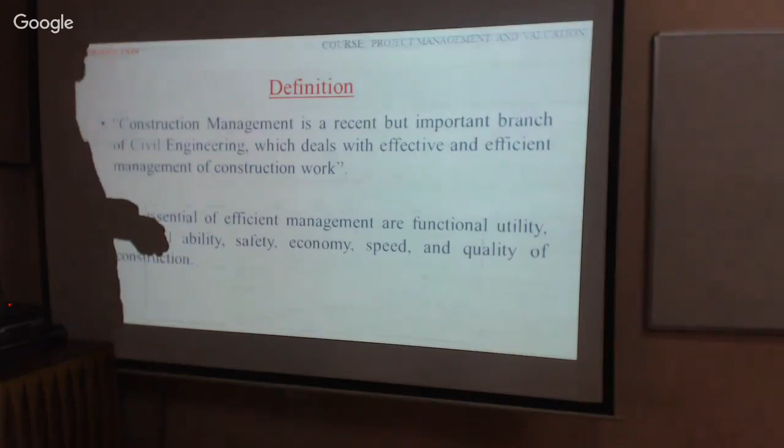It is better, let us continue. Continuously, if we go through this we can understand many things. This is the second class. Already we have discussed that construction management is a skill-oriented topic. We are not calculating anything, we are not designing anything.

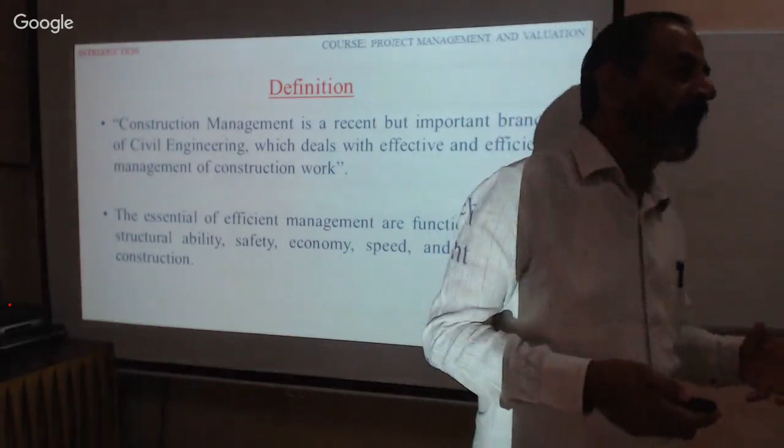We have to manage the project. The project may be anything: construction of buildings, bridges, roads, whatever may be the infrastructure. I will discuss elaborately one by one. Now the main object of this subject, project management - who can manage? Who can be a construction manager? The construction manager must be a civil engineer or any other engineer. Any engineer can become the construction manager. Manager can be anybody who manages the projects, the manpower, the human resource, who manages the business organization - anybody can become the manager.

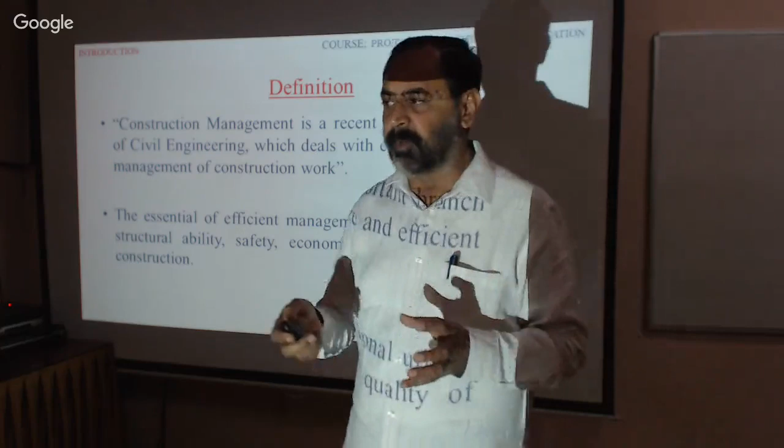But when you come to project management, project is also different - we have different areas, in different disciplines we can find projects. Project means a group of people put together executing a job, a particular job. With respect to civil engineers we are discussing, so this subject is related to civil engineers. Therefore I am concentrating on civil engineering projects. Please understand, whenever I say projects, it means projects related to civil engineering structures. Let us understand like this.

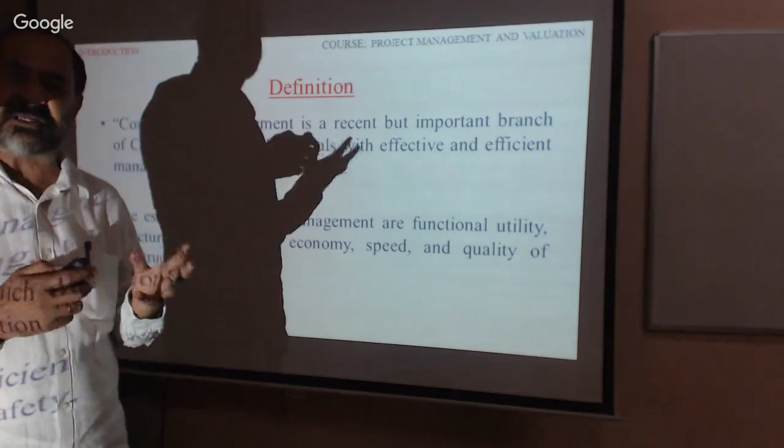The main definition is efficiency and time. Efficiency means, in all activities of construction, achieving more by spending less - that is efficiency. We can't build the structure without material, we must use appropriate material. While using appropriate material, one should remember there should be no wastage - that is the efficiency you can achieve.

We can control the cost, we can speed up, we have to plan - that is the definition of construction management. We have to achieve quality, structural ability, functional utility. Whoever may be called an engineer, particularly a civil engineer, should know this.

This is the functional aspect, functional utility. It means for the purpose for which we are building or constructing, it should be utilized for that purpose - it serves the purpose. It should be utilized for the particular purpose.

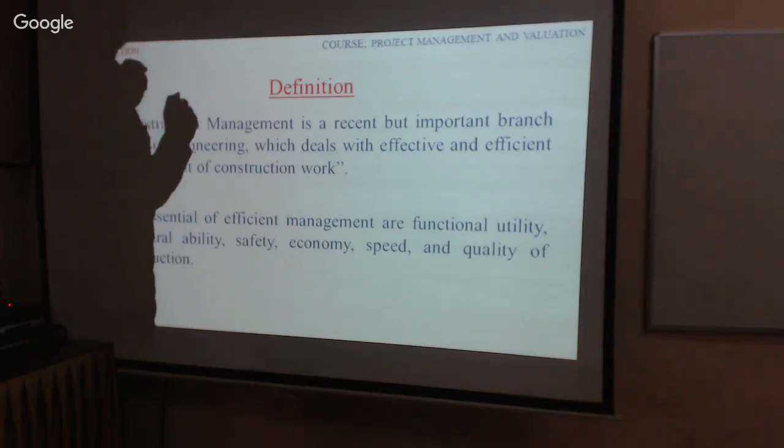The second one, structural ability, means sound and strong. Whatever we build should be sound and strong, to bear the loads and resist forces. Please remember, safety is also one of the important factors to know about. And achieving the economy means spend less, get more - economy and speed.

Whenever you finish the job and want the building completed, you need thorough scientific planning, isn't it? That is what we are discussing in this subject, also without compromising the quality of the construction.

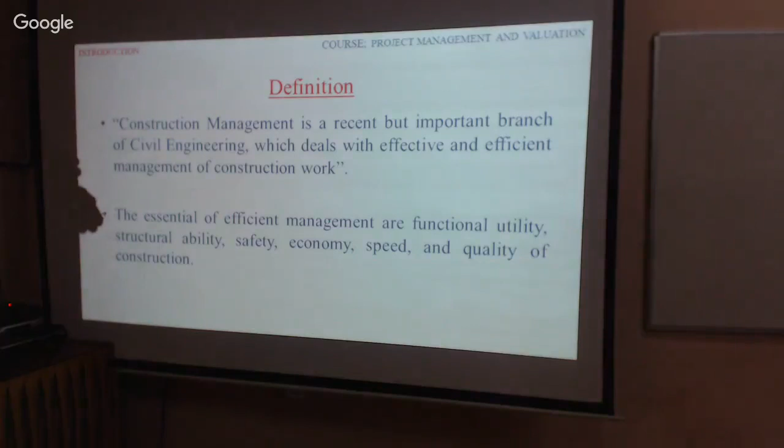Please remember, no doubt, this is one I discussed elaborately in the last class. This is the KRS Dam built by Sir M.V. If you go through the theory and history, we can find out so many things, isn't it?

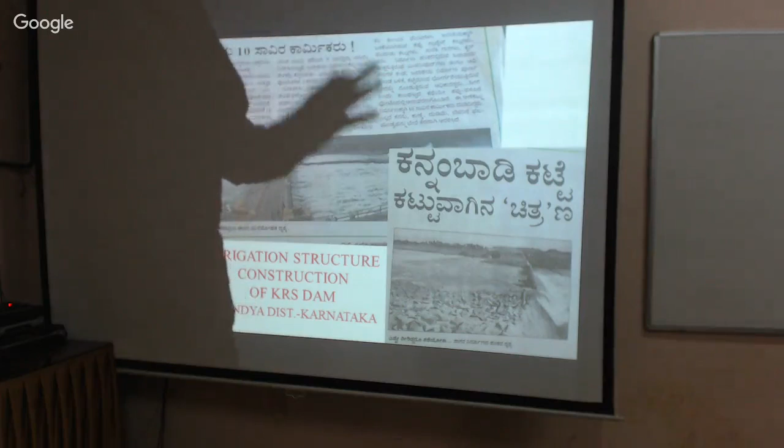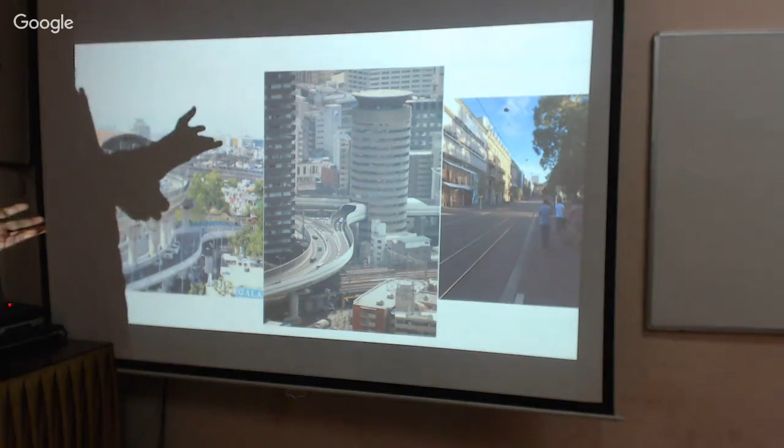This is project one, see this. This is the metro rail, and these are the buildings - office buildings, commercial buildings. Everything we have here - flyover, road, metro, everything. These are the projects. When you look at this, everybody will be happy, isn't it? All the engineers will be proud to be part of this organization, part of this project. You may be one among them tomorrow.

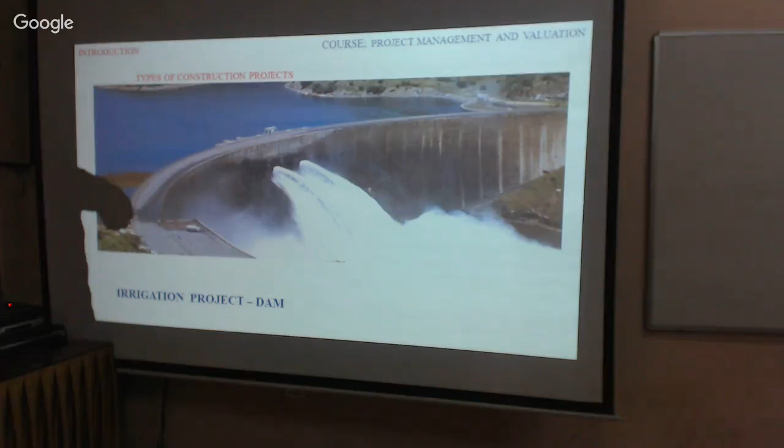Similarly, this is another irrigation project, the Arch Dam. There is a purpose for this - why they build it this way is that the length is more, but it is more stable. And this is one industrial shed constructed by steel structure.

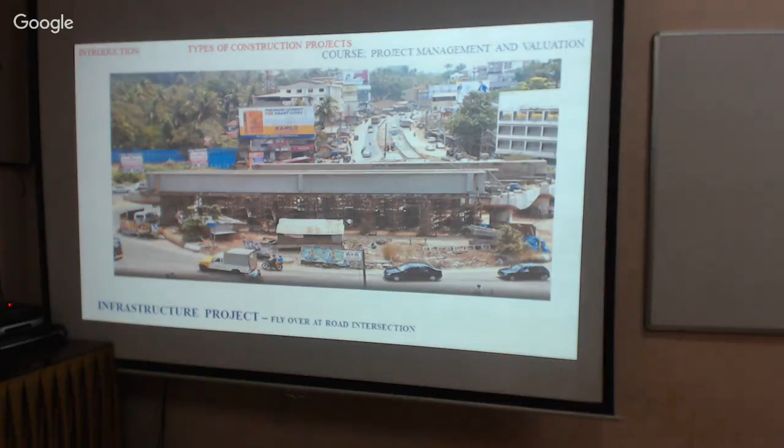And we have another project, construction of a flyover - I think you can recognize where it is. And this is road construction, another infrastructure project. These are the projects, handled by individual engineers or a group of engineers, isn't it?

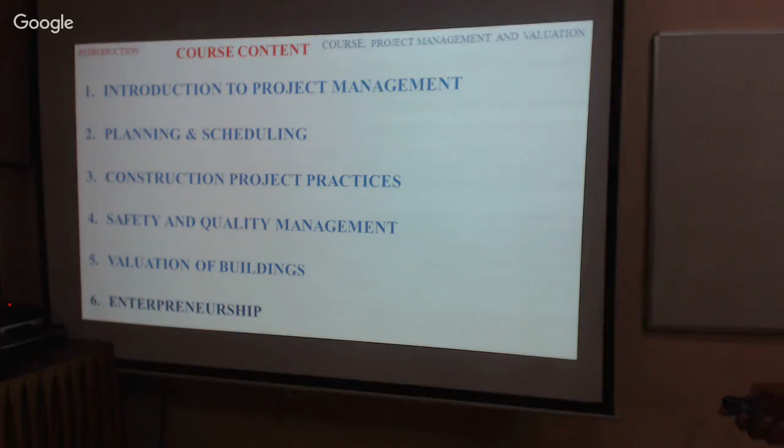Now this is the course content we have in our syllabus. The first is introduction to project management, planning and scheduling, construction project practices, safety and quality management, valuation of buildings, and entrepreneurship development. These things we have in our course content syllabus. This is again more explanation about the syllabus, available on the net.

You can go through the text to see what contents we have in the syllabus. In the last class also I explained about it, so let's just go through the course contents - we will discuss one by one later. Similarly, there are 6 units we have, which we will discuss one by one later. Please remember, whenever project management comes into picture, what is the aim?

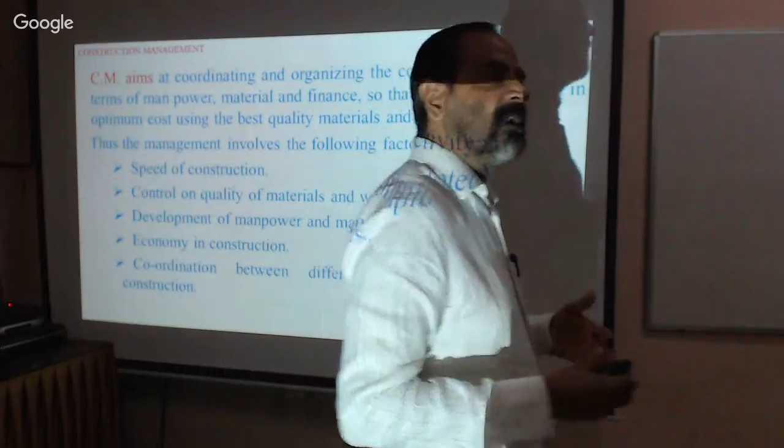What are the aims? The aim is speed of construction. When you complete the project within the specified time, that starts yielding benefits. For example, if you want to construct a residential building, you fix the time, organize the money, organize the material, and organize the people. You must plan in the right manner, and then definitely you can achieve speed.

When you fix a building construction activity, prepare the plan, obtain permission from authorities, you have to organize when it should be commenced and completed. This you have to plan properly. Otherwise, suppose if you complete within 3 months, you may need to go to the site for 10 or 20 days. If the same project takes 6 months, you need to go more number of times. If you extend it further, you need to go even more.

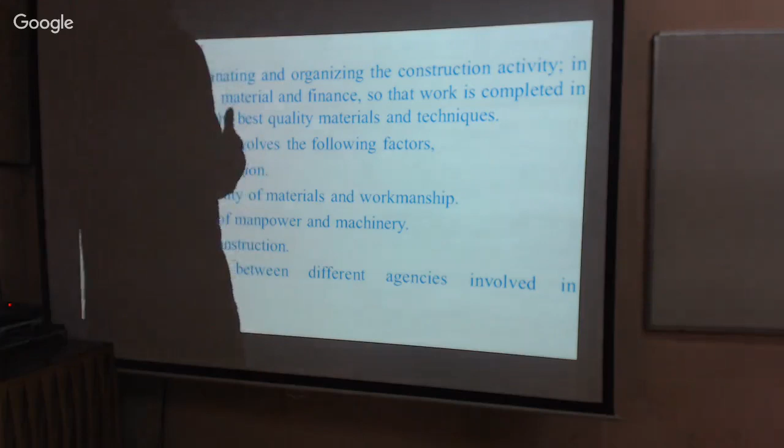Sometimes our Indian Standard Bureau keeps modifying the codes, depending upon time availability, changing technology. The codes will be modified. Therefore, you must go through the code, learn it, understand it, and read it now and then. It is compulsory - one should understand it. Then you will become a professional, a master in your field.

Quality control is one of the most important aspects. You can recognize the quality of any structure just by seeing it. An ordinary person will say this is good or this is bad - everybody, ordinary people, will speak about construction activities. Therefore you have to follow these things - workmanship, finishing.

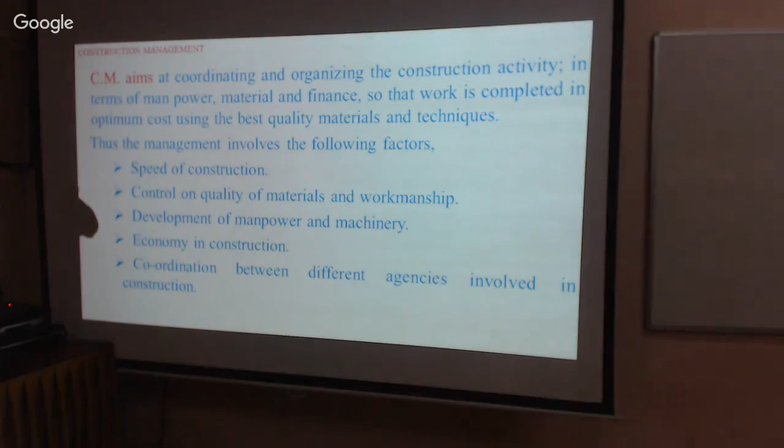Scientific method should be applied, proper way and proper techniques must be utilized - like manpower and machinery, development of manpower and machinery. To complete or execute a project, we need different kinds of people. I will explain that elaborately in the next slides.

Similarly, economy - construction economy, and coordination between the different agencies. I'll come to that in the next slides. And in any construction activity, please remember the number one, the first one, is material.

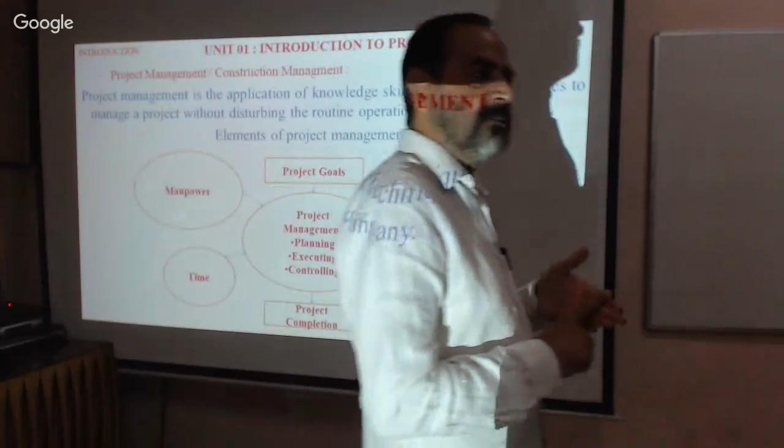Men, material, machines, and money are involved - it means 4 M's. You must always keep these 4 M's in mind. You have to manage these 4 M's, plus one more element: time. If you manage these elements, definitely you will be called a professional.

Now please understand, over the last 3.5 years, 2.5 years, you have learned how to prepare building drawings, bridge drawings, irrigation structures, and structural drawings with detailing. You have learned what is concrete and what is cement, how to prepare the estimate, and how to conduct the survey, gather information from the field, and process it.

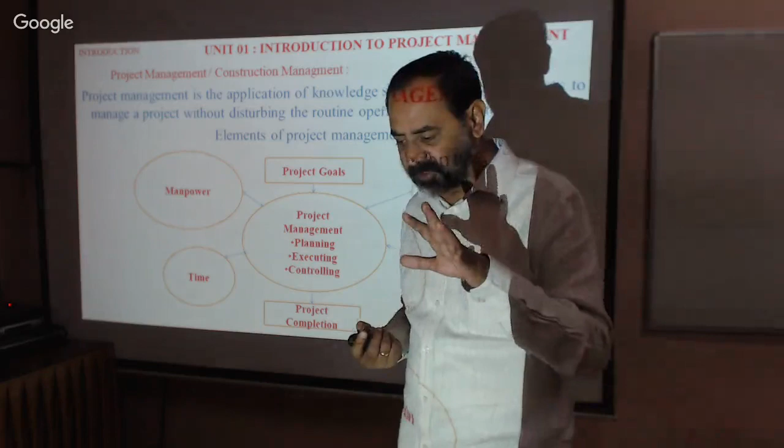Therefore, now you have to manage all those things: the technology, men, material, machine, and money. If you manage these 4 things plus time, definitely you will be called the professional, and you will be a good manager. This is the main object of construction management - we are managing these things.

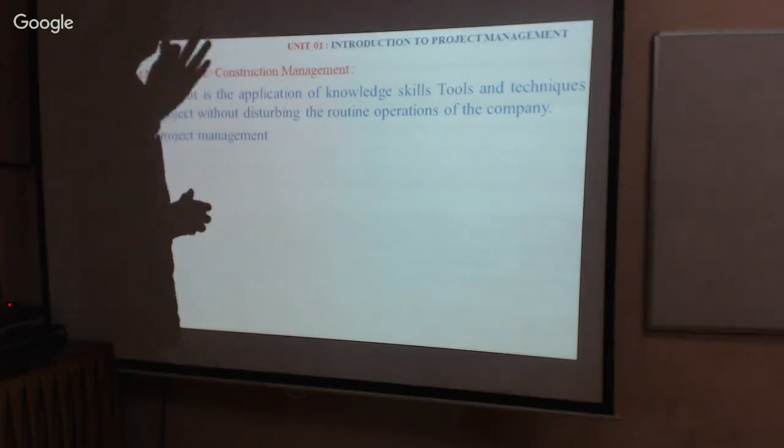Now similarly, see the processes: material, men, machine, money - 4 M's. Remember this, 4 M's plus time. If you control these things, definitely we can control any project. The product will be very good, you will get a better product. This is one important aspect one should remember. Being a civil engineer, being a project manager, we should know how to manage, how to control these factors.

When you get involved, you must have thorough knowledge about the drawings, the materials, and the people - how they will get involved and do the job. You are the deciding authority. You have to decide it and control the material. Then you can achieve everything, reach the goal, achieve the management. You will be called a good manager, and your salary will go up based on your experience. Therefore, we should get involved in the project.

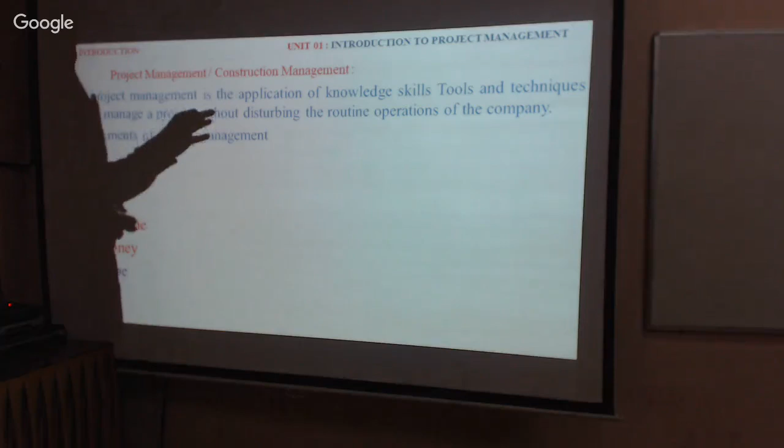Similarly, now I will tell you about the materials - how many different types of materials are being used in construction practices. I will elaborate about the material and when, covering these things today. I will just give you a glance of it.

Now see, this is cement. I think you all learned about it. There are different types of cement available. For cement we have a code - how the cement should be, what should be the quality of the physical character, the quality of the cement. You have learned about it, but you need to know how to manage this because it is highest consumed. Different types of cement are available - let us have the knowledge about the cement.

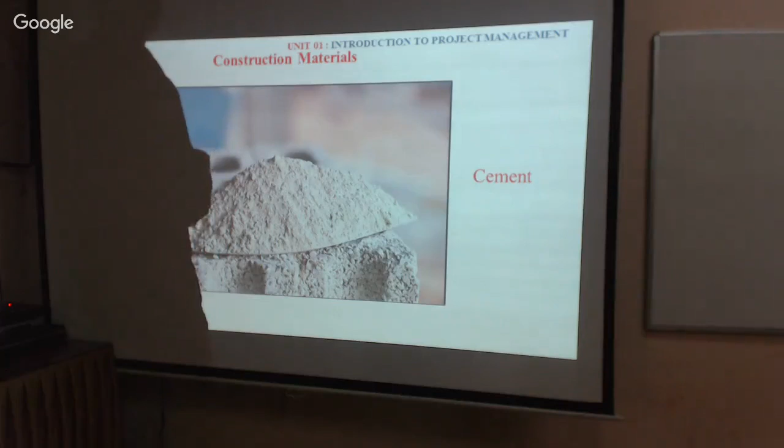Different color cements are available, different types of cement are available, with different strengths for various purposes depending on what you are utilizing it for. Cement is one of the most important products used in the construction industry, so we should know how to manage this. It's a very big topic, and concrete is related to this cement.

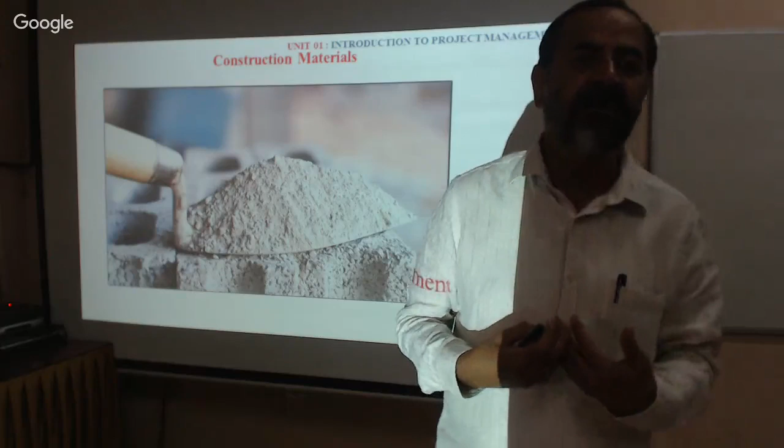Now, after water and after food, the next most consumed material in the world is concrete. Wherever you go, you will find construction activity going on. Therefore you have to manage it - no wastage should occur, and everyone should understand about cement.

And similarly, now this is sand. Natural sand is available, and manufactured sand is also available. Where and when it should be used depends upon the availability and where you are, depending upon the location where your project is proposed and where you are the in-charge of the project. You decide which is the best material you can go with.

You all learned the quality and how to assess the quality of the sand, isn't it? There are so many tests that will be performed for different purposes, different grading, different zoning. Now you are deciding which sand, where it should be used. Please take care of this.

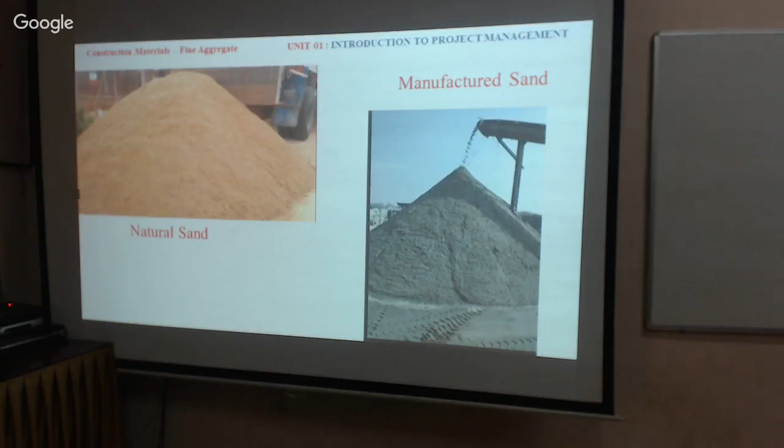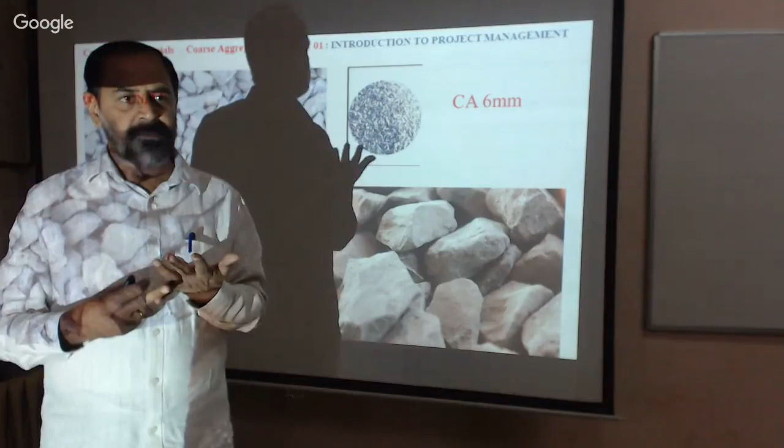It must fill the gap. Therefore, 40mm and down means there is a grading. You have to analyze which quantity, and the aggregate is used for different purposes - road and building construction. And dam construction - everywhere we are using this aggregate. Now which aggregate, what is the maximum size, what is the minimum size - this is analyzed.

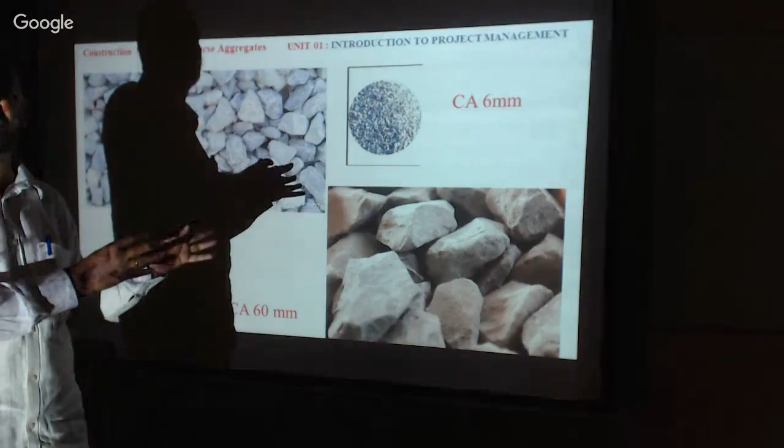Also the aggregates are used for concrete and also for bitumen in the road. Therefore the character of the aggregate, the physical character may be different for road concrete and for the bituminous roads - it is different. Therefore concrete for structure, the character is different. So let us understand, we should know about it.

I think you have conducted the test on this, and you have performed it, isn't it?

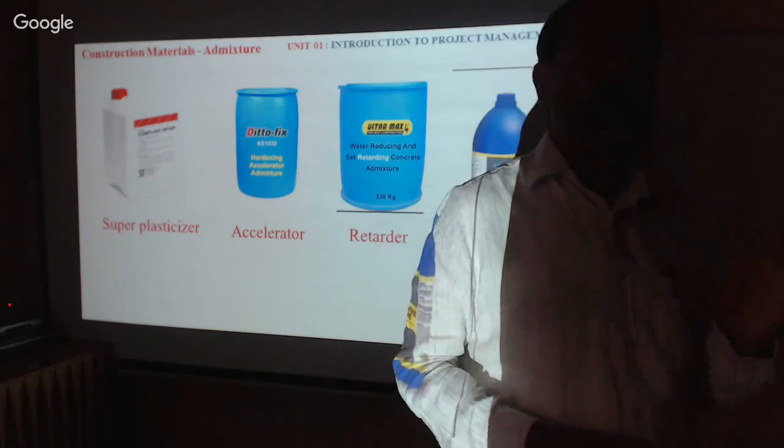Now these are the construction chemicals. Today we have the technology - we can control the concrete. We can set the concrete setting time. We can control the setting time, we can accelerate or we can retard it.

Normally the concrete setting time minimum is 30 minutes and maximum final setting time is 10 hours. Minimum initial setting time is between 30 and 60 minutes. Now, therefore, we can control.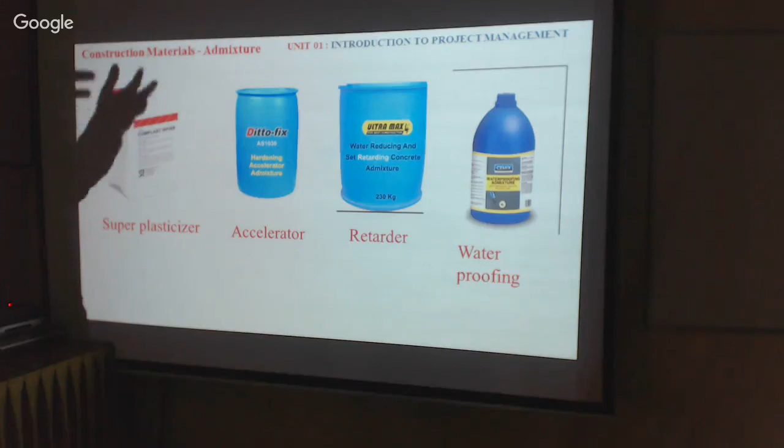Today we are the master, we are setting the contract - now we have to set this time using construction chemicals. There are n number of companies available who will produce the construction chemicals appropriately. Accordingly, we can use this. We should have the knowledge of all these materials. Then only we can become the master, then only we can control the project. Therefore, let us have the knowledge of all the materials.

Let us have thorough knowledge about it. We should know about its character, strength character, physical character, everything. We have to assess it. Being an engineer, we should know what the bundle is.

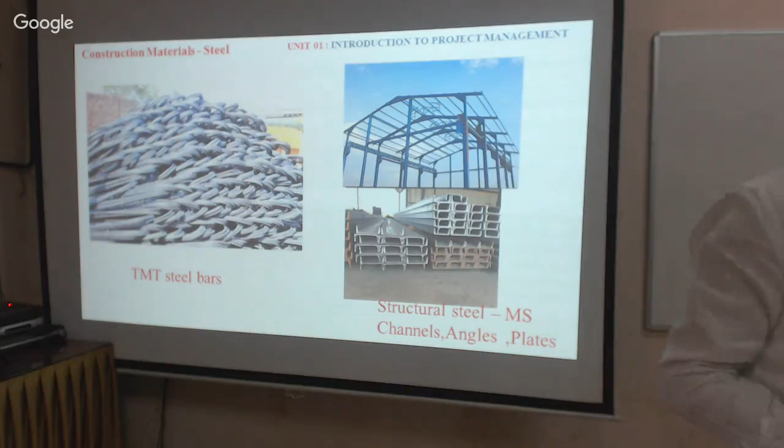When your steel is purchased and received at your site, you are unloading it - there you can find out the amount of steel you have received, without necessarily needing to check, if you have thorough knowledge about it. You must have this knowledge. Each bundle weighs approximately 50 kilo.

If it is 8mm, you will get 11 to 12 numbers in each bundle. The length of one steel piece is approximately 12 meters, depending upon the company and manufacturer. Depending upon the quality, there may be some variation - 10 or 15 centimeter variation.

I told you that the steel weight, each bundle weight, is approximately 50 kilo, again depending upon the company, manufacturer, and the quality.

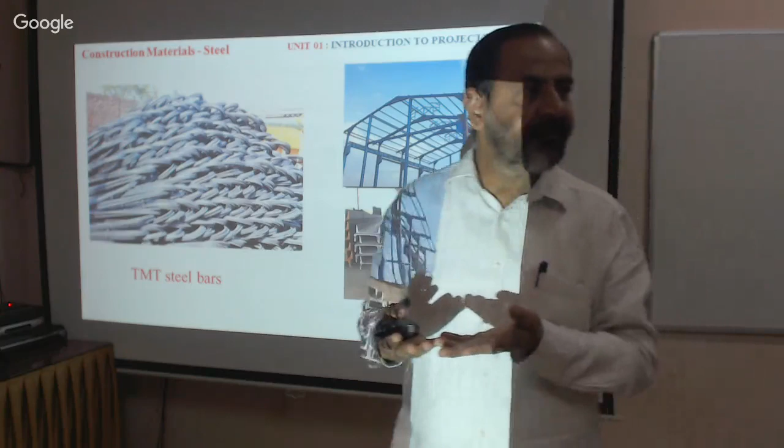Sometimes what happens, the length may be varying. Therefore, 47 kilo to 52 kilo we will get it. One bundle may be weighing 47, 48 kilo. The another bundle is weighing 50 or 52 kilo, 51 kilo. Average, approximately you will get 50 kilo. Each bundle weighs 50 kilo.

The length of each rod is approximately 12 meters, sometimes 11.75, 11.8, like that. And each bundle is 50 kilo.

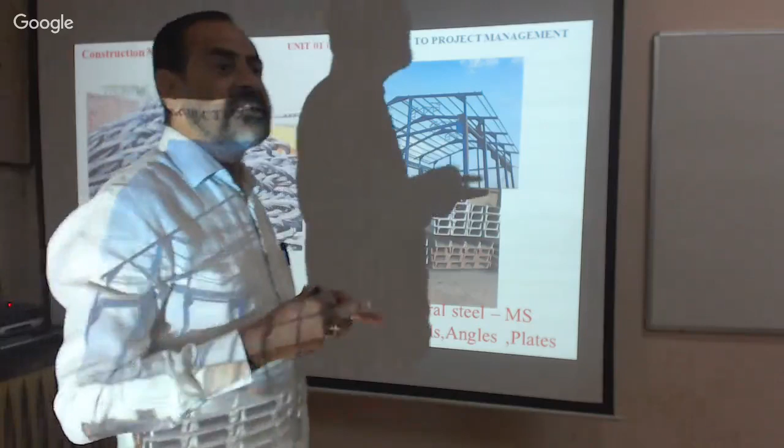Already I told you that if it is 8 mm steel, it is 11 to 12 numbers. Suppose if it is 10 mm steel, it is 7 to 8 numbers. Suppose if it is 12 mm, 6 numbers we will get. Suppose if it is 16 mm, we will get 3 numbers. Suppose if it is 20 mm, we will get 2 numbers. So this is the knowledge we should have.

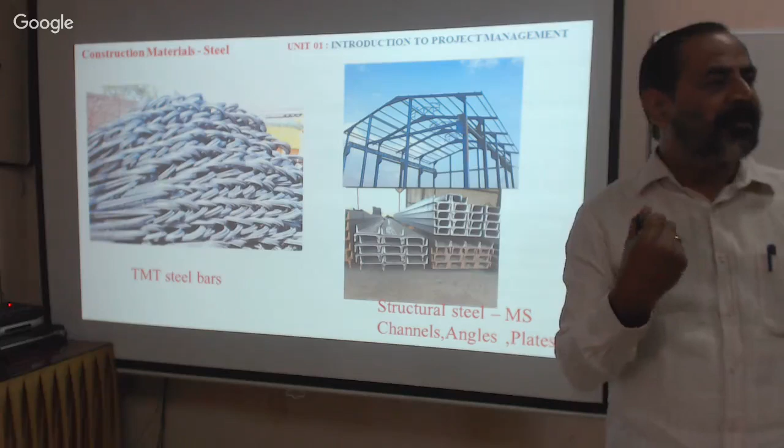A civil engineer must have the knowledge of the material. Then only you can become the master. You can control the project. This comes based on your experience, based on your involvement.

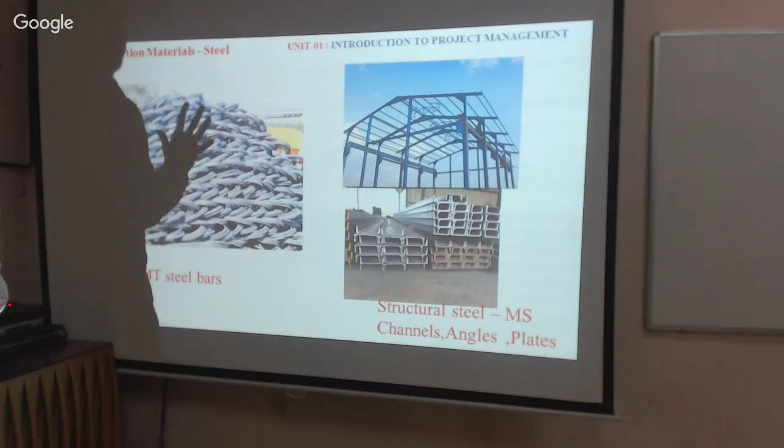If you want to become a good civil engineer, if you want to become a manager, construction manager, project manager, you must involve, you must understand the material. You must understand the people, you must understand the technology, and you must understand the people around money, the value of the money. Then only we can become their manager.

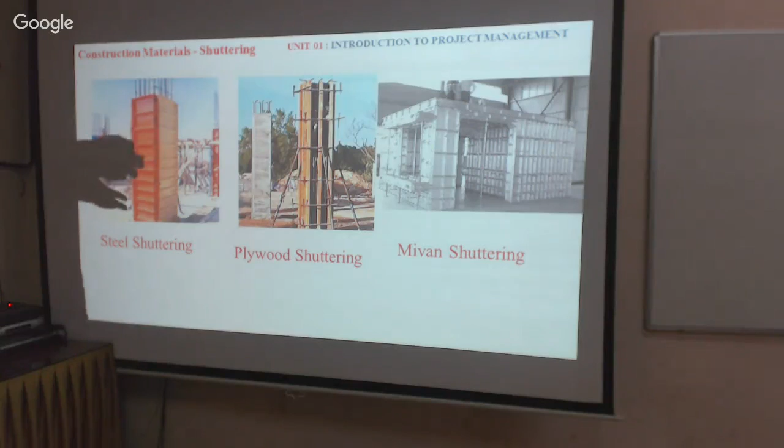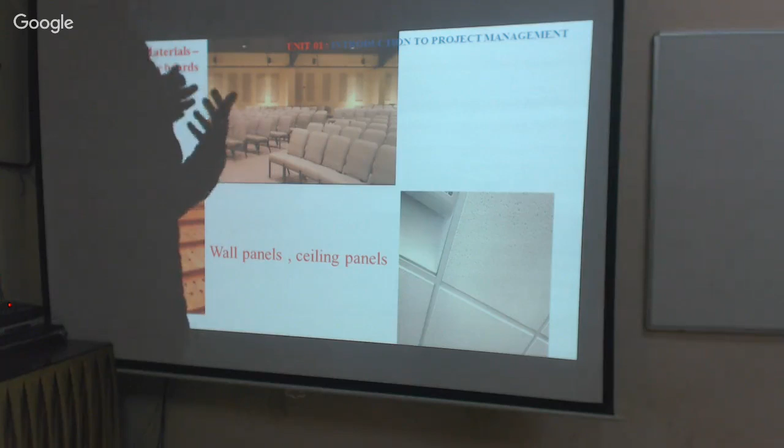Available in the market. And these are some construction materials - fiber cement board, gypsum board, drywall technology. There are different types. You can see this, wall panels, ceiling panels. These are the materials we should have knowledge about. Now you need not search for the material, it is available everything, you can get everything from the net, you can access it. You need not run from pillar to post like in earlier days. Today you will get everything, all the information in your hand. Therefore, the only thing you should have is the wish and will to learn.

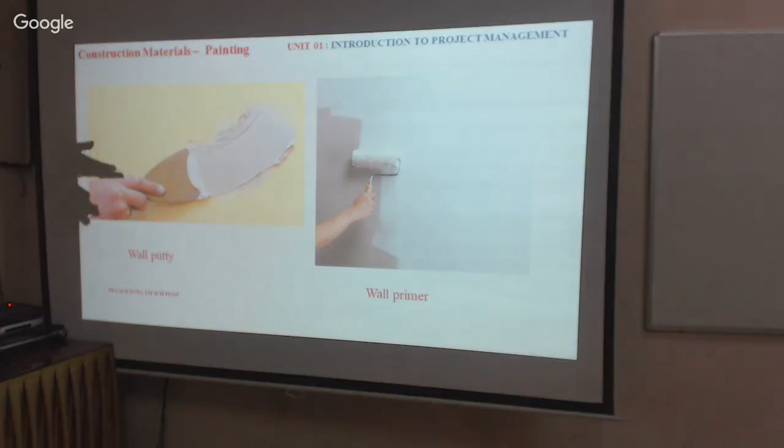Now, different materials - vitrified tiles, granite flooring, then ceramic tile flooring. These are the materials involved in the construction activity. Then wooden flooring, then polyvinyl flooring. Now these are the material paints, exterior paints, interior paints, then wall primer, that is wall putty. See, now this is bitumen waterproofing for terrace, and then acrylic polymer putty. Now these are the construction materials.

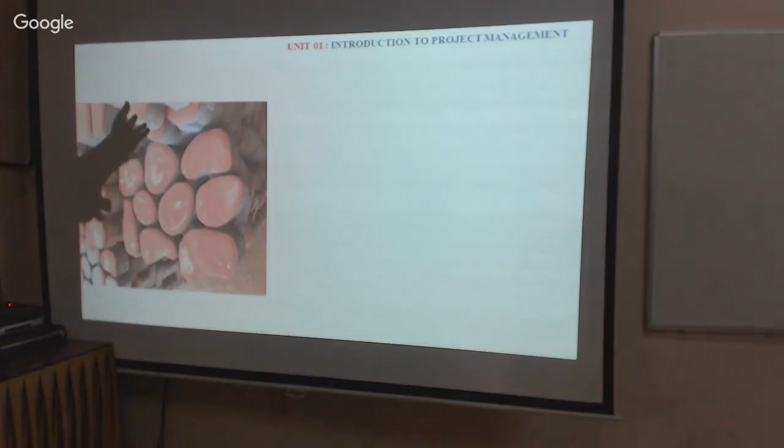Now please understand, the project management or construction management involves again the same thing, that is a technique. The project management is the application of knowledge, skills, tools, and techniques to manage a project without disturbing the routine operations of the company. Whatever we have discussed, it is summarized - the project management comprises of only these things. But now this is the definition we can say - what is project management? Everything what I have told now is involved in this.

Again, for a few more classes I will discuss about it. We are concentrating only on about this, but there are different areas, different techniques, different types of planning, different materials. We will go through that one by one. Now please note that is material, man, machine, and time. Don't forget these four. If you forget these four, forget civil engineering.

One material involved, I will discuss about it - the material involvement. The other thing is men involvement. Please remember here, men involvement is most important. The material, of course, is available in the market, but the men, that is most important.

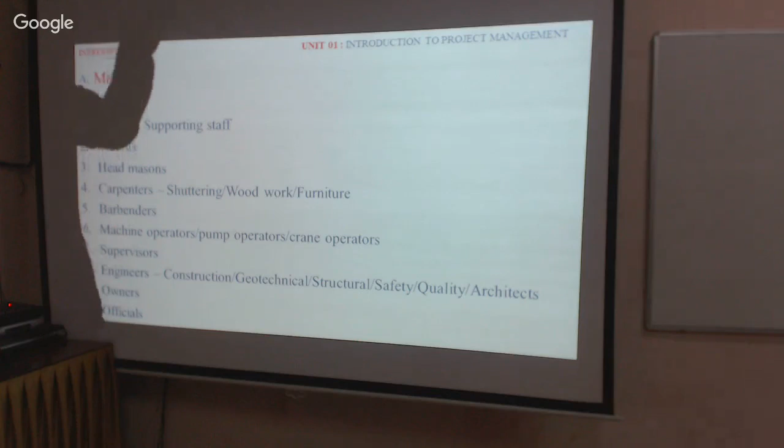And we want carpenters at the site. For everything we need the carpenter, whether it is an infrastructure project, a home, an apartment, or whatever the project may be, we want carpenters. The carpenters may be of different classes - shuttering carpenters, before and during construction activities, to prepare and cast the columns, beam, slab. So we want shuttering carpenters. And similarly we want woodwork - doors, windows, furniture, interior - for everything we want these people, called carpenters.

And barbenders - we want quality barbenders involved. I may be skilled, I may know the construction activity very well, but am I able to do barbending work? Or can I become the mason? No, we have to prepare the people for it. There are experts available for that job, called barbenders.

And similarly, now we want machine operators. There are plenty of machines working around the project, so we want people - machine operators, called drivers. He may be operating construction machines, maybe a truck driver, maybe a water supply unit operator, or a pump operator - they are the people involved in construction activity.

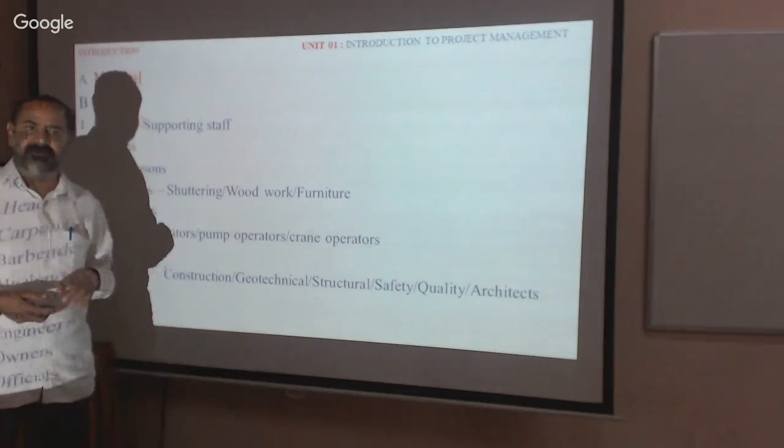Then, technically qualified supervisors - maybe an assistant engineer, maybe a junior engineer. They are technically qualified supervisors, and they must always be available at the site.

Now similarly we have engineers - construction engineers. We have different types of engineers available for each and every aspect. Now an engineer, the construction manager, manages everybody. The construction manager is a different person, the site in-charge. You can't do everything yourself - there are so many things to be done by the right people at the right time. He is the manager who has to manage all these things.

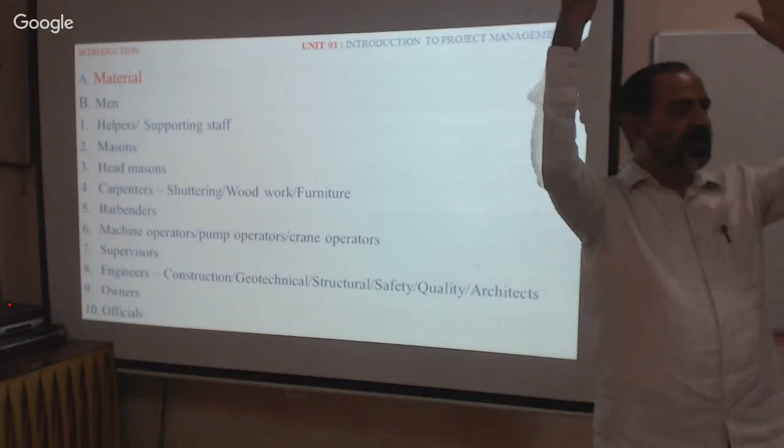Therefore please understand, when you build a multi-story complex, construct a flyover, or construct a bridge, first the surveyor will come. You have to conduct the topography survey, longitudinal survey, cross section, all those things will be prepared by the first person. The next person, a geotechnical engineer, has to come.

He has to assess the soil. What is the safe bearing capacity of the soil? The first job is to complete the survey work, then assess the quality of the soil. What should be the foundation? That is decided by the report prepared by the geotechnical engineer.

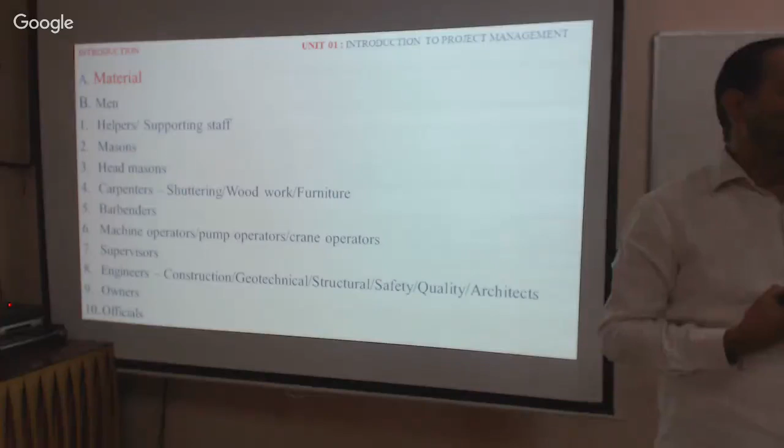Please understand, the load that is transferred goes from structure to foundation: slab to beams, beams to columns, columns to foundation, foundation to mother earth. That is the mechanism, the load transfer mechanism.

It is decided by the structural engineer. The structural engineer has to say what should be the size of the column, what should be the size of the beam, what should be the size of the footing. It is decided by the structural engineer.

But the structural engineer cannot decide on his own. He can give the design, the size of the column, beam, and footing, based on the plan prepared by the architect or civil engineers, based on the report submitted by the geotechnical engineer, based on the quality, that is the character of the earth, the bearing capacity of the soil.

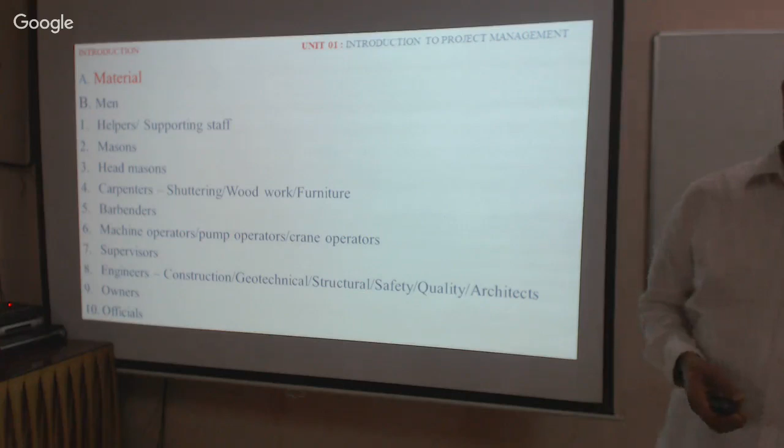Now we need the structural engineer, and also we need safety engineers. Today, in recent years, the safety area is gaining more importance. Wherever we look, we can find safety engineers. Basic qualification is civil engineer, mechanical engineer, or any other discipline, and you will be trained as a safety engineer for a 1, 2, or 3 year program. We want such people, because safety is another important area which should be covered.

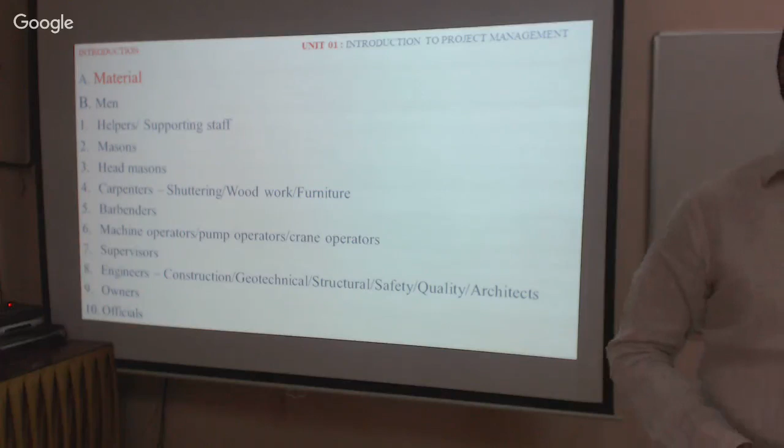Not that we haven't concentrated on it before, but in recent days we are concentrating on it. The engineers, the many people involved in this, and the owners and officials - this is another important task a construction manager or civil engineer must know about. Let us discuss this a little bit.

Now please note, here the owner - who is the owner? An individual. If I am building my own home, I am the engineer and I am the owner. Everything will be done according to my requirement.

Similarly, suppose it is a partnership firm, 3-4 people put together, you start one company and you are building a home or preparing some project, then according to your requirement it has to be done. It has a different procedure than what we have for a proprietor.

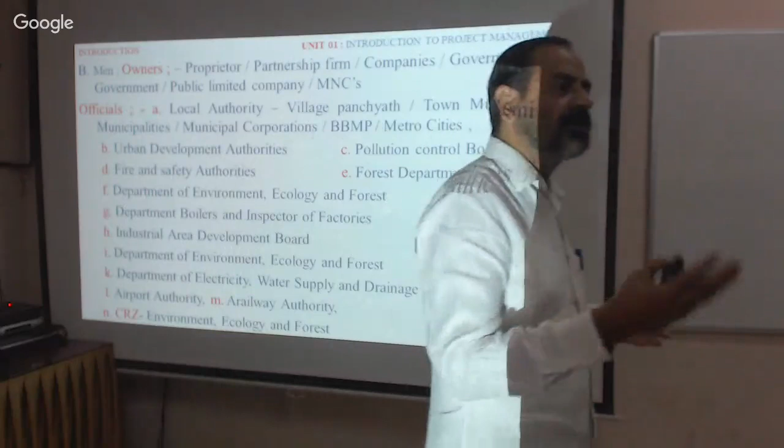And similarly, companies - 10 people put together start one industry, my company. When they start the industry, they are the owners, they will build. Like the company and infrastructure projects - bridges, railway lines, roads, dams, government offices, hospitals, educational centers - who is the owner? Owner is the government. Road - who is the owner? Government is the owner.

Suppose you are building a flyover - maybe an individual can build depending on his capacity and project in his compound. But in general, when you speak about roads, bridges, dams, reservoirs, railway lines, the owner is the government.

Sometimes semi-government, partnership - half owned by the government, half owned by the public, general public, or individual - that's semi-government. Then public limited companies, like our MRPL, public limited. It is a government company, but it is public limited, meaning the money poured into that project is by the people. It is a public limited company. The rules are different for that.

Therefore we should know about it, we must know about it - who is the owner, who is the contractor, who is the builder, who is the promoter, who is the architect, and who is the engineer. Now we should know the difference between all these people, because we have to employ those guys.

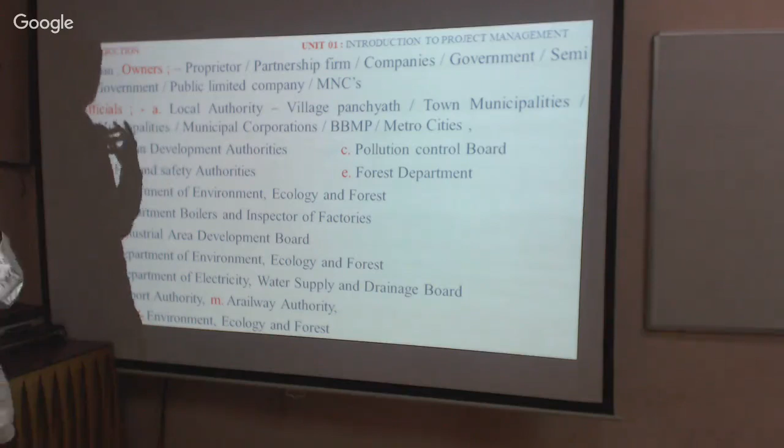When we employ those persons for the right work at the right time, it is called planning - which time, who is required, when who is required. That is decided by whom? It is decided by the project manager. Project manager has to decide it.

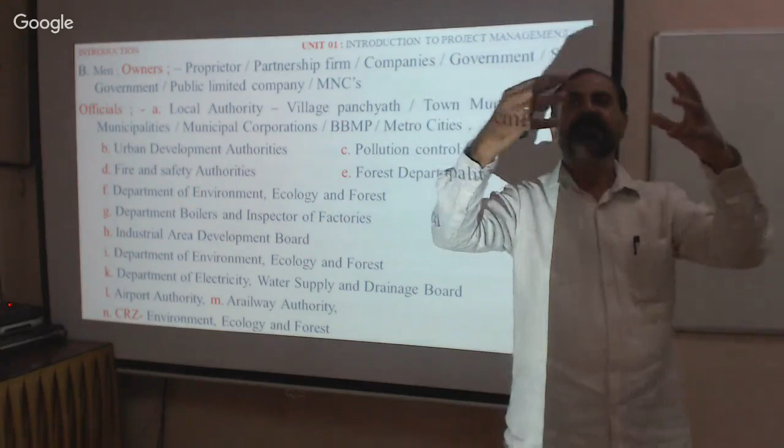Now please understand, when you get into the field, after completing your diploma or degree, first you have to learn all these things. Only because of this, this course is introduced in your final semester. It is understood that you are all civil engineers, therefore we have to understand this. This course is incorporated in the final semester because you are all engineers. When you go out, you should know, you must have the knowledge of all this. That is the object, isn't it? Our course objective is, when you go out, you should be aware of the world, how the world is moving, what are your roles and responsibilities, where you are to fit, that you have to decide. Only because of this, the course is kept in the final semester. When you go out, you will be a full-fledged civil engineer, that is our object. Now if you understand this, our half of the problem is almost solved, isn't it?

Now our project can be done in a beautiful manner. First understand this, number one, the officers involved. Now when you are constructing a project, suppose if you are building a home for your neighbor, then you need not worry much about it. You prepare the plan, go to the local authority, submit the application, obtain the license, then start construction of the building. That job is done.

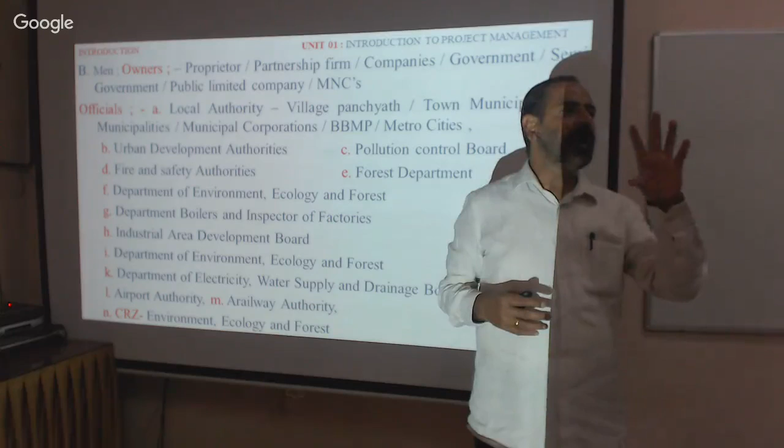When you are building a multi-story complex, isn't it? Now you can see Mangalore, the town is flourishing and looks very beautiful, and every day we can see buildings which are going upwards. We can see a 10-story building. The minimum story now in Mangalore, people are building minimum 4-story or 7-story or 10-story buildings. No new individual buildings are coming up, all the buildings except individual houses are multi-story complexes. All the projects are high-rise buildings, isn't it? You can see around, the projects which are coming are going upward, vertical growth we can see.

Now therefore, if you are building only one house, no issue, you can build with more comforts. Now you need to go to your local authority. Please understand the local authority, what is local authority? Local authority means approving authority. Somebody has to regulate, you can't build as you like, we are not authorized to build as we like, isn't it? Therefore there are regulations stipulated by the authorities.

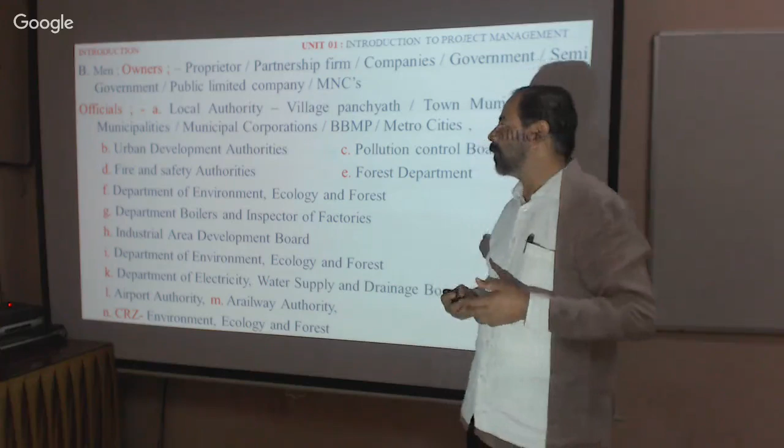Suppose if you are building a home in your village, then need not worry, go to the panchayat, submit the application and pay their fees. We need to pay some fees, get the license and complete the home, that job is done. When you are constructing the building in Mangalore, in a town, in the municipality area, you seek the permission from the local authority. The local authority, please understand, the village panchayat, then town municipalities, then municipalities, municipal corporations, BBMP, metro cities.

Now see, for example, a village panchayat, everybody knows about it. It's a small village comprising of 1,000 or 2,000 families, it is governed by those people, they have formed their regulations. According to their regulations, you have to build your home. If you come to the town municipality, they have their own regulations, you have to follow that regulation. Therefore you need to go and submit the application, take the permission, then do it.

Similarly, town municipalities are a little higher level, they have their own regulations on how you have to build your home without disturbing others. The main regulation of any authority controls the light and air. Please remember this, light and air, which is more important for all living beings, and which is available free of cost. Don't disturb it, that's all. The main object of regulation is don't disturb the others. Wherever you go, this is the object, regulation object number one is don't disturb the others.

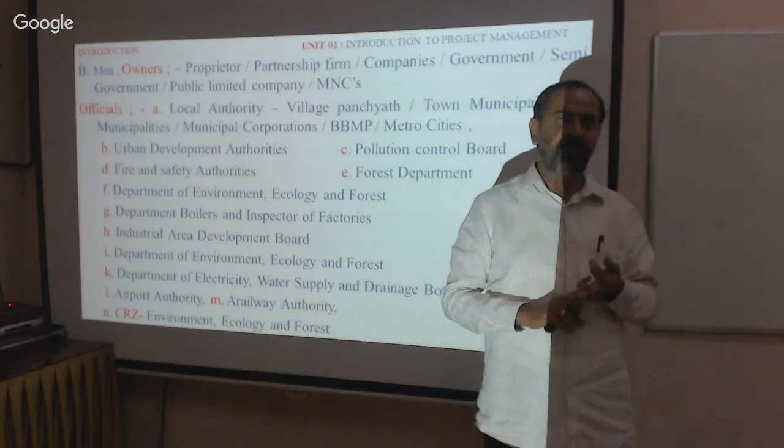Number two, make use of the light and air in a beautiful manner. It is available free of cost. Can anybody live without air and light? No living being can. Everybody wants light and air, both are very important for all living beings.

Therefore, the government says follow the guidelines fixed by each authority. Depending upon the town and the size of the area, they have formed their own regulations. There is a law: village panchayat, town municipality, then municipal corporation.

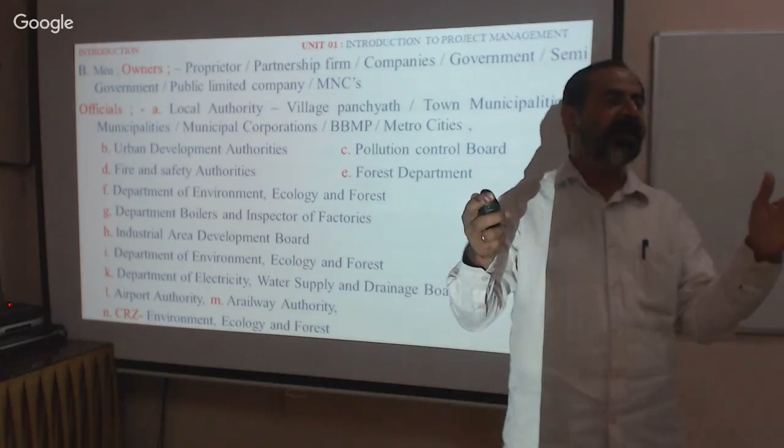If you go to the taluk level, you will get municipalities at the taluk level. If you come to Mangalore, that is a district headquarters, there is again a different prescription. Which is municipality, which is corporation, and which is metropolitan city is decided by the government depending upon the population living in that zone or area. So if you go to the municipalities, you follow the same procedure.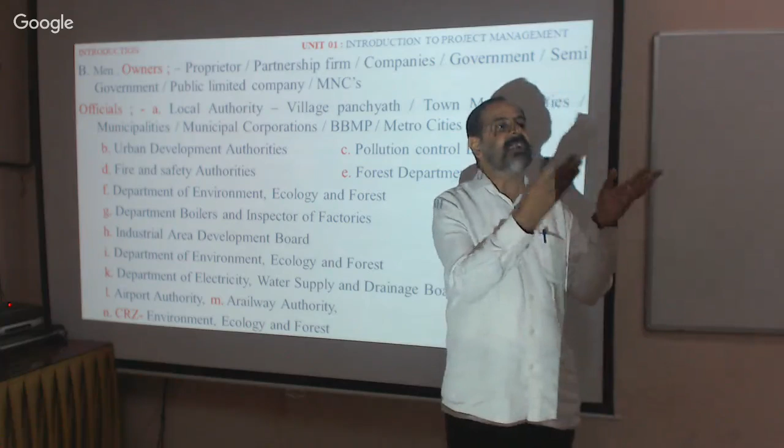Then if you come to a municipal corporation, more regulations are stipulated on you. Then you proceed to BBMP, Bangalore. BBMP means Bruhat Bengaluru Mahanagara Palike. Their regulations are different from other towns, but their object is the same: don't disturb the others and get good water, good air and light. That is the main object.

And then that is metros. For each and every town or place, there is a different regulation, and everyone should follow that. Similarly, there is another one, the Urban Development Authority. Each state government, depending upon the government, sets this up.

Normally in Karnataka, the state government prescribes and sets up a body, an authority. The authority in Mangalore is Mangalore Urban Development Authority, which we call MUDA. Similarly, Bangalore Development Authority, Mysuru Development Authority. They control the growth of the town, that is their main object.

They control what they are doing. They plan for 20 to 25 years ahead, how our city will look after 25 years. Where is the residential locality, where is the industrial locality, where is the commercial locality, where should be the park, and where should be the school. They prepare the entire map of the town, and it is their authority controlling it.

Any changes or violations, they will come into the picture and take action. Then you need to change, you need to follow the procedure if you want to make changes. This is all done by urban development authorities, controlling the development of the town.

And that is the pollution control board. We have one more, the pollution control board, which controls air pollution, water pollution, and noise pollution. It is a government organization that controls water pollution, air pollution, and sound pollution. Everything will be controlled by the authorities.

When you build a project, you need to take permission from them. If it is a mega project, you need to take permission. Similarly, that is the pollution control board.

Then we have fire and safety authorities. This was a neglected area until now, but in recent years it is covered under this. When you construct a building of more than 15 meters, you need to take permission and set up 5 controlling devices that you need to install in your building.

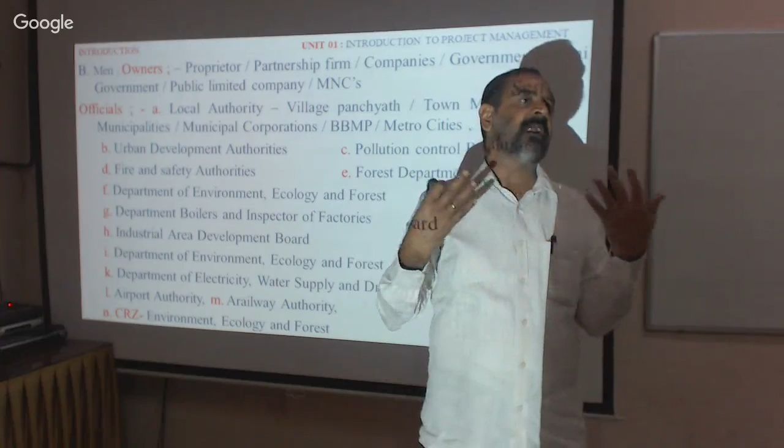Therefore, you should go and take permission from them, then install the devices, then you'll be allowed to get into the home. Don't think that when you look at the town map and see many high-rise buildings, they are all happy — no, not so. Maybe happy in some area, but they are working hard day and night to provide all these things.

Therefore, the engineers have more responsibilities towards the people, the general public. You need to take permission from the fire authorities. And similarly, we have the forest department.

Suppose if you want to cut a tree on your land, you need to take permission from them; otherwise you can't build. It's not so easy, you need to follow some procedure. You go to the office, submit the application, take the permission, then cut the tree. Then only you can develop your home, you can build your home.

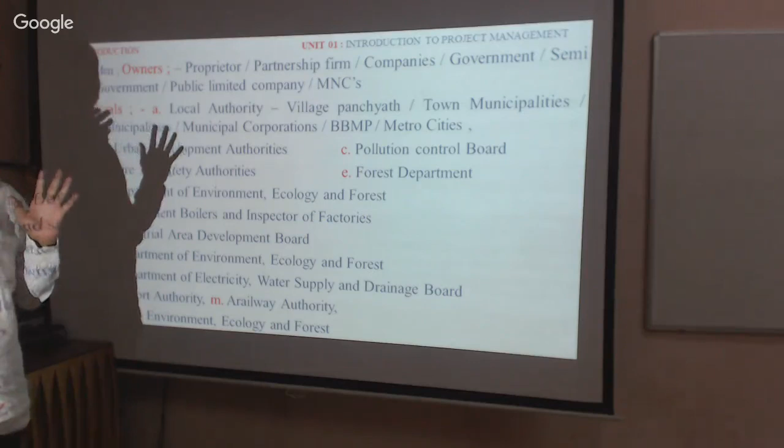Similarly, we have the Department of Environment, Ecology and Forest. This is the central government body. When you are building too big, when an apartment has more residents, you need to take permission and follow the standards set by them. Don't disturb the ecology around you. When building a home complex or constructing a road, you need to take permission because it's a mega project, not a small one.

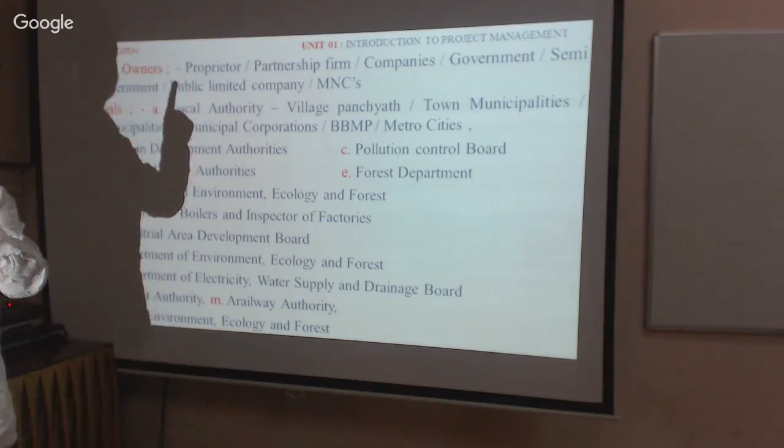But for that also you need to take permission from the Department of Boilers and Inspector of Factories when setting up an industry. When setting up an industry with more than 20 people or more than 5 HP, you need to take the permission from them. They have their own standards, you need to follow that.

Similarly, there is the Industrial Area Development Board. Suppose if we are developing a project there, you need to take permission from them and follow their procedure. And like the Department of Environment Ecology, I think I repeated that, okay.

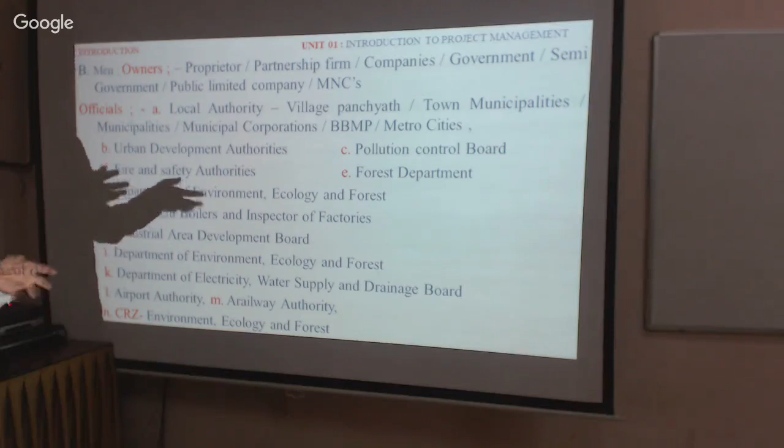Department of Electricity - to get the connection, you need to go to them and follow their rules and regulations. Then only you will get connection for your electricity and water, from the electricity and water supply board. And to send your waste, your sewage, you need to take permission to connect it to the UGD.

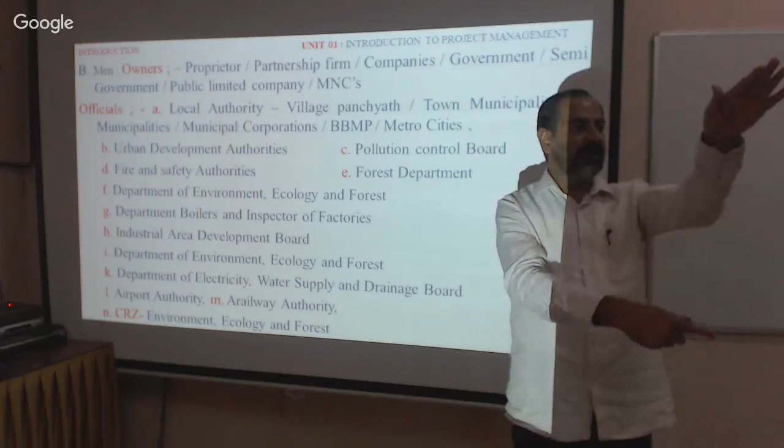Similarly, if you are building a home in an area like an airport authority area, when building more than 2 meters for a particular distance from the airport, you need to take permission. Now we have an airport in Bajpe. In Bajpe locality, anybody wanting to construct more than 2 floors - ground plus 1 and more - must submit an application along with the drawing and take their permission before building. They will decide how much building you can have, because of their flying angle - the takeoff angle and clearance required. Therefore you need to take permission from them.

Similarly, the Department of Railway. Suppose if you are building a home or a road near the railway station, along the railway track, you will be affected - we have to follow their rules. One should follow, we can't compromise. The government will not compromise at all. The government has set some rules, you have to follow them, then they will give permission. Otherwise you will be cut.

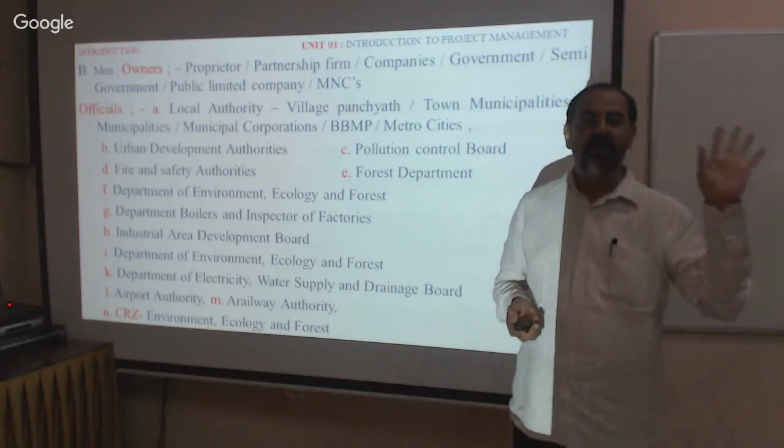Therefore there is no question of violations in construction activity. Follow the standard, material standard, rules and regulations - everything we must follow, no compromise at all. Similarly there's railway, environment ecology, and CRZ - Coastal Regulation Zoning. It is applicable for the coastal zone.

Now, where you need to build along the seashore, if you want to build a home or develop something else, there is an authority set by the government. You go and tell them, I am 1 kilometer away from the high tide level, please look at my project, I am doing this. You take the permission from them, then you can build. Blindly we cannot.

Now after becoming an engineer, you can't just act as an engineer. You can work as an engineer, you can discharge the duties of an engineer, but you will become fully qualified only after going through these things. Therefore it is very essential to go through these things.

Now let us learn one by one. I will give you much more in the next class.